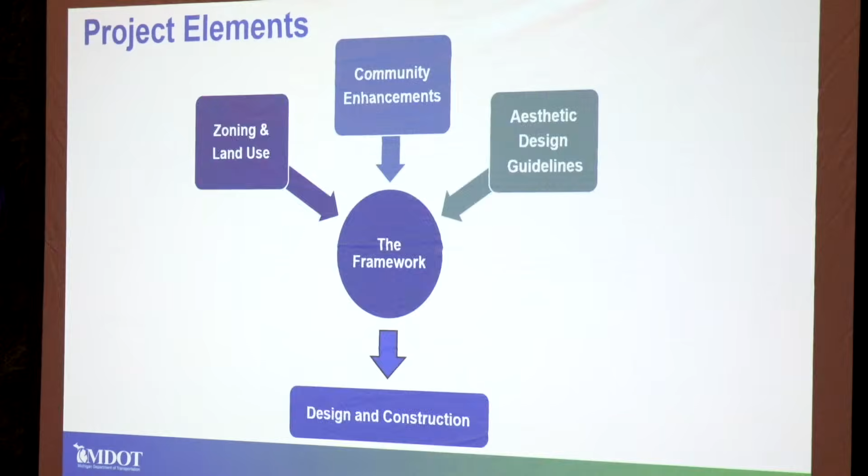One of the things we've done during this pause is assess, like I said earlier, where the pinch points are and what we can do differently to build this project. On the left, you see the storm sewer south of Jefferson—this is the early stormwater work we actually started about a month ago.

The reason being is that it does two things: one, it provides independent utility—no matter how 375 shakes out, this is a benefit. The other thing it does is provide environmental cleanliness, putting us more in line with EPA and clean water guidelines. I'll get to that in a minute with more detail on what that means.

The new 375 street, Jefferson Avenue to Gratiot Avenue, would basically be the Jefferson portion of the project, plus the boulevard up to just south of Gratiot. That would be built with this project, and we'd be targeting tentatively 2027 and 2028. On the right, you see the I-75/I-375 interchange at Gratiot Avenue—that would be done at a later date.

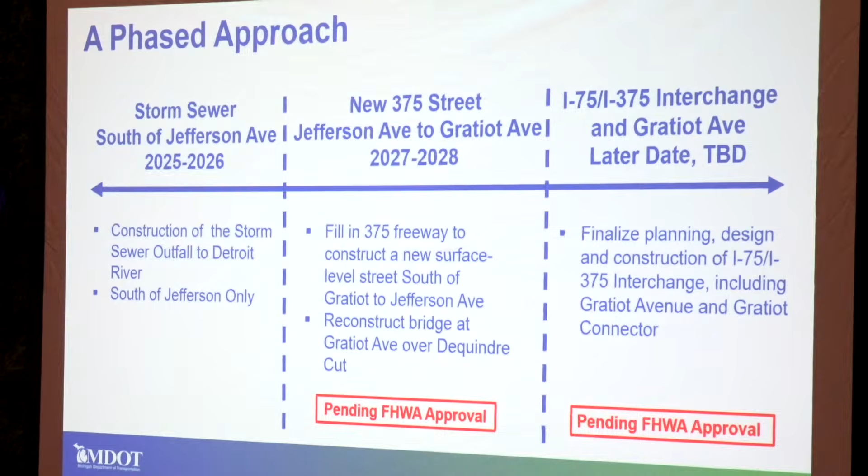So we're essentially taking a phased approach to this: we started the stormwater work, the middle phase we'd be starting in a year or two tentatively, and the future interchange at Gratiot would come at a later date. Now, all of this is pending Federal Highway Administration approval, and I'll get to why here in a few slides—but in the end, we have to prove to them that this project is still safe for motorists.

So when I talk about the stormwater outfall, this is the work south of Jefferson, and I wanted to show this graphic so it gives everybody an idea of specifically where we're talking. So this is along Schweizer Place, and it goes from just south of Woodbridge out to the Detroit River to the outlet. This is a large concrete precast box culvert that is going in now, and will be all buttoned up and restored in time for the Grand Prix next year.

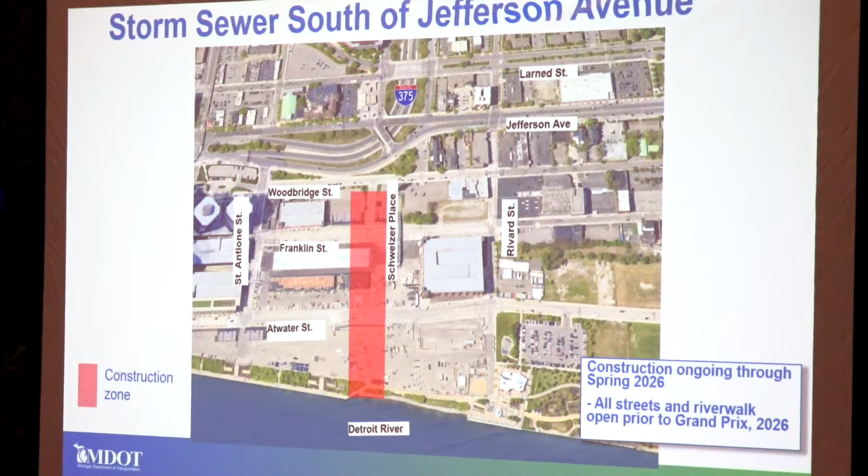So several decades ago, a lot of large cities and small cities used to do what was called combined sewer overflow. Instead of putting in a sanitary sewer pipe and a storm pipe, the idea was that you would save money, you put in one pipe, and that pipe would service the toilets, the showers, and any rainwater that would be over a certain intensity, so larger storms.

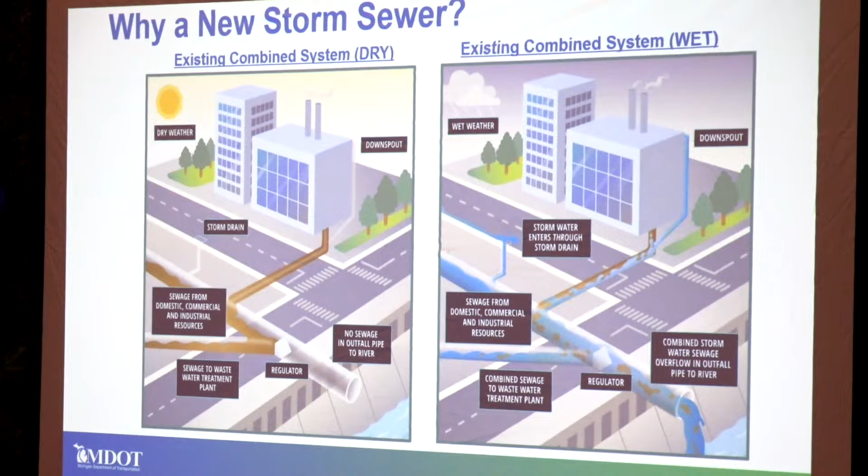So this graphic shows just that. On the left is dry weather. Everything's working well - you've got the one pipe and all the sewage is going to the water treatment plant. There's no rainwater to worry about. On the graphic to the right, this is what happens when you get a certain storm that overflows and overwhelms that pipe - it overwhelms that regulator. So you have all of that water mixing. Some of it goes to the wastewater treatment plant, some of it discharges to the river. Obviously, we all know that's not a sound environmental solution.

So with this project, we'll be separating that pipe. In this graphic, you see sink water, shower water, toilet water, etc. That all goes to the wastewater treatment plant. And storm sewer runoff has its own dedicated storm sewer pipe outlet to the Detroit River.

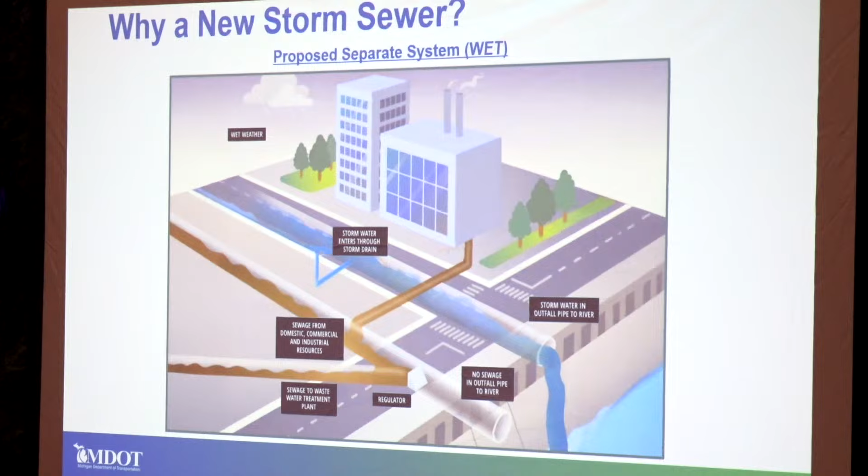So two things. One, the wastewater treatment plant doesn't have to treat all of this additional stormwater, so that's less load on the wastewater treatment plant. The other thing is that before the water discharges to the Detroit River, it would go through a series of what we call hydrodynamic separators - basically separating silts, grime, oil, gas, anything that ends up on our roadways that you don't want in the river. And then we will have an annual maintenance program where we have to suck those out.

This isn't the first time these have been used. These are in other parts of the state, other parts of the region, so this isn't a new technology, but it'll be something that we'll have to add on to our maintenance program.

So if you're like me, all those words are a lot and you'd rather see a graphic. I'm more of a graphic guy, so this kind of shows what that phasing looks like. I think I have a laser, I do. So down here, this is all very similar to what we had previous with the at-grade boulevard, the East Road, but when you get up to the Macomb/Clinton Street area, that's where you start transitioning to the freeway. So I'm going to do a zoom in so that you can see that a little clearer.

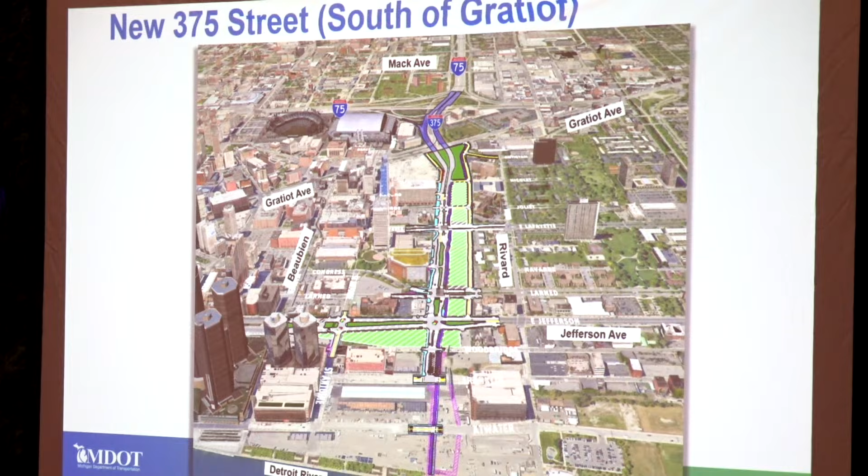So this is basically everything south of Gratiot and then extends to the interchange. You can see that blue-purple line - that's the transition from the street level at-grade boulevard to the freeway. So when you're sitting at the signal at Macomb, and if you're going northbound, you're going to go through that signal, and then you start on a descent downhill to go under the Gratiot Bridge.

So in this plan, the Gratiot Bridge doesn't get replaced with this phase. And then you would continue on, and the interchange configuration - we wouldn't be working on that, it wouldn't be replaced right now. Similarly for southbound, but a different story.

So when you're coming southbound, we still have the northbound to southbound 375 ramp. You have the southbound traffic - all of that goes under the Gratiot Bridge, and once you go under that bridge, then you start on the ascent, and you meet the at-grade boulevard at about Macomb Street. So Gratiot stays in its current configuration, the interchange stays in its current configuration.

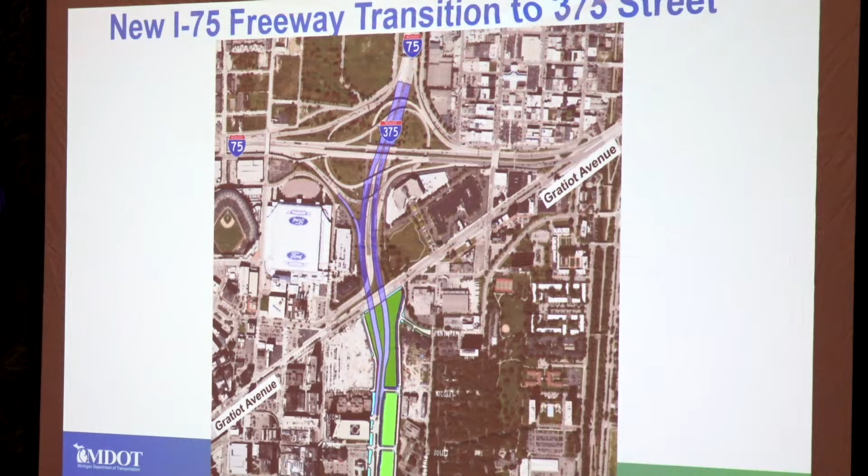The only caveat to this is the Gratiot over the Dequindre Cut - that bridge was built in 1929, and it is in very, very poor shape. So we will be replacing that as a part of this project as well. So a little bit more removed from all the activity that's taking place south of Gratiot, but still very important.

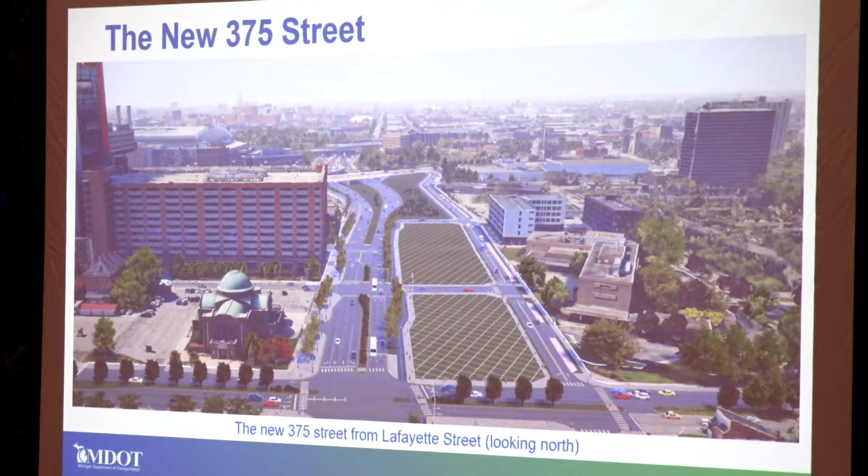As far as the interchange goes, just prior to the pause we were deep into modeling it. We looked at existing traffic volumes pre-pandemic and put a growth rate on them, looking at real traffic numbers. We heard a lot from the community that the diverging diamond interchange was not people's favorite, so we said let's take a look at these traffic volumes, run the modeling again, and see if we can determine one or two alternatives to that diverging diamond interchange.

Something that fits the urban fabric a little better than a large DDI interchange. Now, a DDI has a lot of pros, but it has a lot of cons too. When we went through this modeling effort, we determined there were two, possibly three alternatives to the diverging diamond that would work for the traffic volumes we're experiencing, or with projected growth. We're looking at 25 years in the future - what does that growth look like, and can it handle that, while still being sensitive to how big we build this?

The saying we've been using is, you don't design a church for Easter Sunday. We don't want to design this so it can handle three times the normal traffic, because then, for lack of a better example, like our favorite grocery store - unless it's Christmas time, most of that parking lot's empty. Same idea here - we want to make sure we're sizing this well so we're not spending more money than we should to meet the demand. During that time we determined there were some alternatives to the DDI, but there will be pros and cons to those. We're still in that modeling effort right now.

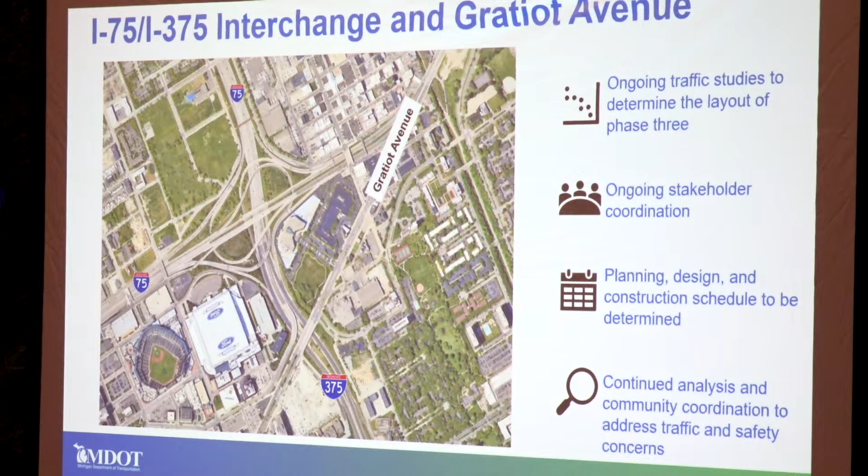As far as what's next, obviously continued community engagement. We'll be having a series of these community meetings pretty much to the end of the project. I mentioned earlier about FHWA approval, so that's something we're working on getting through the winter on that more phased approach. Part of the concern Federal Highways had was what do you do with traffic coming southbound going 70 plus miles per hour as they come into an at-grade street level boulevard. So we're going through that analysis to determine what bells and whistles we need to put in to start slowing people down.

I'm a firm believer that people drive what they're comfortable driving. There's a reason why I-75 in a rural area feels comfortable to go 75, maybe 80 miles per hour - I'm not advocating that, I'm just saying. So if people are going that speed, it's because it's very wide open.

Wide lanes, wide shoulders, the tree line is far, and you can see everything in your periphery. But when you're in a more urban area, you don't—

You shouldn't feel comfortable driving 70 miles per hour through this, right? So in order to do that, we have to introduce some geometry to the southbound road. We have to put in different kinds of pavement markings. The lane widths will be, instead of 12 foot, 11 foot. Obviously a lot of flashing signs and lights and all that. But still, the geometry has to change in order for people to feel uncomfortable driving 70 miles per hour, so that it's not a safety risk.

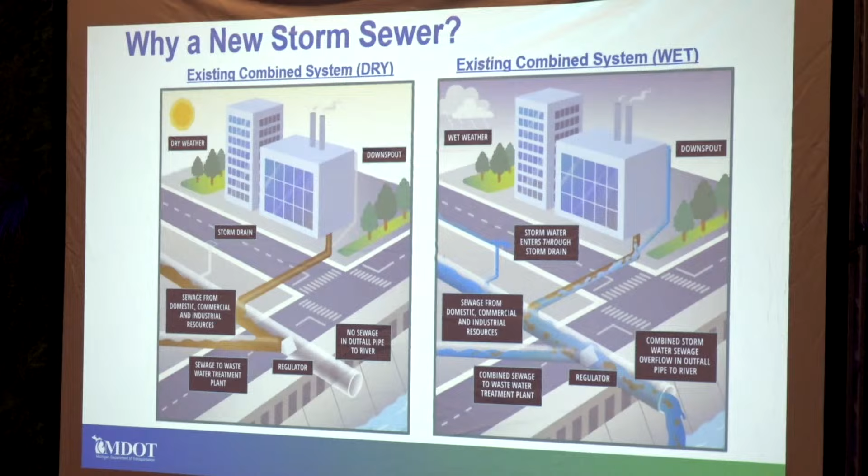And the intent we have is to completely separate it, so when there's stormwater entering into MDOT's storm system and DWSD's storm system, it gets treated with a certain type of inlet before it goes straight to the river. So it's a much cleaner situation for the stormwater that goes into the river. And like Jason said earlier, it takes pressure off of the sanitary sewer system, so all the wastewater that goes to the treatment plant, it's not quite as intense. And when there's a storm, it won't affect the wastewater treatment plant like it does today.

So this diagram you have right now, are you saying there's currently sewage water going to the river? Yes, at times. This is kind of an antiquated system, but yeah, this is the way they were designed and built in the early 20th century. That legacy system exists today, and a lot of systems around the country are combined sewer systems. So during heavy storm events where we get a lot of stormwater, the sanitary or combined system gets overwhelmed, and some of the overflow that's supposed to go to the wastewater treatment plant overflows into the river instead. It's not just the Detroit River — it's a system commonly used throughout the country, and we're trying to fix that.

Okay, so this is an improvement for the current flow of sewage going to the river, and your plan is to improve that system? Absolutely, yeah. Thank you. You're welcome.